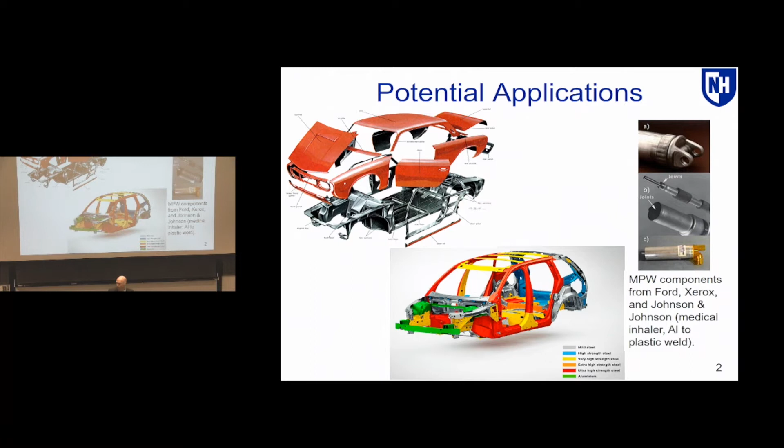So you need to join them together. Or there's some other applications - this is actually something from a printer or even a biomedical case, but you have this need for multi-material joining. And so then that's where eventually I'll get to with respect to the talk that I'm going to be giving and the process that I'm going to be talking about.

Before I get there, I'll talk about it in general terms, and you'll see as the introduction in my research background, I deal a lot with metal deformation processes. So what we'll be looking at is high-rate forming of materials.

So one way to get to a high-rate forming process, and what we use in one of the techniques in my lab, is using electromagnetic forming. Typically in metal forming, you'd have a punch with a given geometry that would come down and form a shape that would then take on the shape of that punch. Alternative to that, and that's just pressure and pushing on it, which could be mechanical or hydraulic, you can actually use a magnetic field in order to form a workpiece.

So you charge up a capacitor bank with a fair amount of energy - it could be tens to hundreds of kilojoules of energy. You dissipate that into a coil, and the coil could be as simple as a wound wire coil, or we have some industrial-grade coils within our lab.

You induce eddy currents, and then you dissipate the energy in the capacitor bank into this. The entire process is pretty quick. You have tens of kilojoules passing hundreds of kiloamps of energy through the wire. You create the magnetic field, and that has a sinusoid - I'll show some current traces in a bit. The whole process is done within 100 microseconds, but that magnetic field induces eddy currents in any nearby conductive material, which flow in the opposite direction. Then that creates its own magnetic field, and those two opposing magnetic fields create Lorentz forces that deform the workpiece. I think I've hit all of the things stated on this.

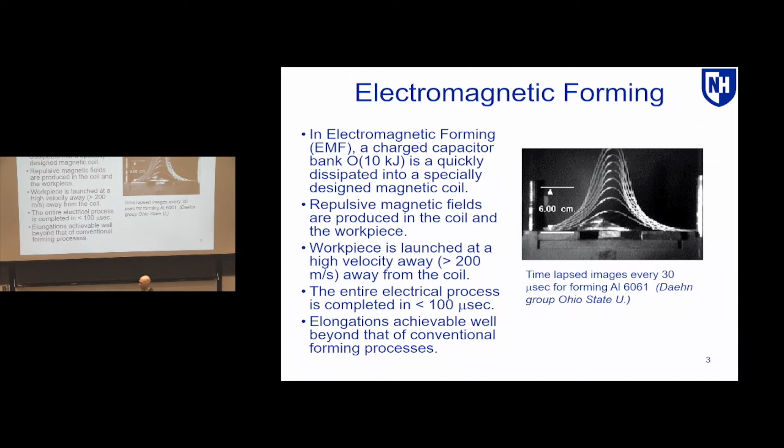More work out of Glenn Daehn's group showing the types of things you can do with this process, as you create micro features and parts with respect to it.

One of the aspects I want to talk about is the physics of the process. Again, you create this magnetic field, inducing eddy currents in a nearby conductive material. Those eddy currents only flow through the outer skin of the conductive material. So you can calculate a skin depth, which is based on the electrical resistance, permeability, and frequency of the current trace - and you create the skin depth.

Again, you can create micro features with respect to the part. Or, going back to that first slide, creating magnetic pulse welds - if you take a tube and a shaft, take the coil, put it around a workpiece, and shrink wrap the tube onto the shaft, you can create a solid state weld.

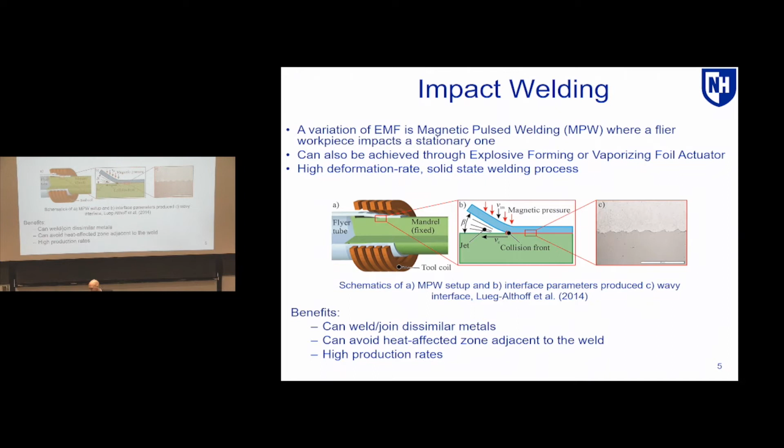Some of the benefits with respect to this impact welding is you can join dissimilar materials, you're affecting the heat affected zone, making it smaller, and then also the high production rates that occur. This just shows some more images of parts or different material systems that can be joined. Here's copper and aluminum, copper and brass, just aluminum to aluminum. You can sometimes see little vortices that get generated with respect to the weld.

And again, you need a certain velocity with respect to the process. And there's a certain amplitude and wavelength with respect to the welds that you typically see in these interfaces. So the research questions we were really after was, because velocity is such a key in the process, can we come up with ways to analytically predict the velocity during these electromagnetic forming processes? We also looked at what the fundamental physical mechanisms were, and then I'll end by talking about some process parameter ranges in which you can achieve the good solid-state welds in the process.

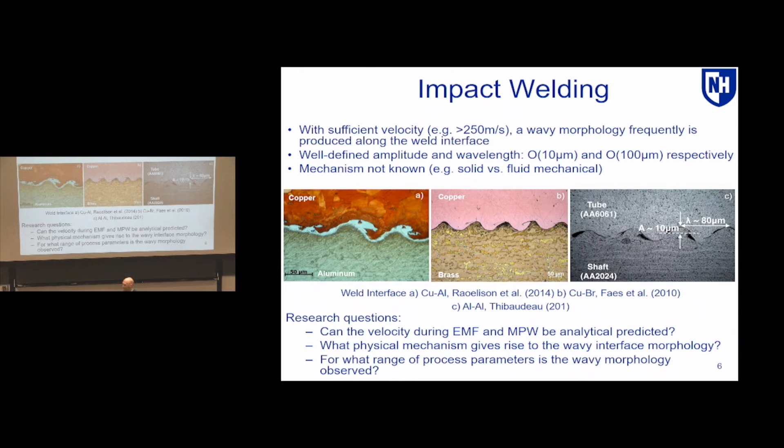So I really already went over an overview of the process. I'll talk about that velocity prediction and experimental validation, and I'll talk about it with respect to two processes. One is just electromagnetic forming and axisymmetric tube compression. So for both of these, I'm really just accelerating the material, measuring the velocity within the process, because that's a key process parameter. And then we'll go on and talk about some numerical simulations of a weldability window to talk about what range of parameters, again, velocity, and the other key parameter is with respect to the impact angle. How are the two materials colliding with respect to each other? That becomes the other key process parameter to consider.

So again, when I talk about electromagnetic forming, I'm going to talk about a specific tooling geometry with respect to that. They talk about this as being the uniform pressure actuator. This came out of Glenn Daehn's group at Ohio State, where, again, they would have a coil that's creating the magnetic field. One of the things you want to do within the process is really control where the current is flowing as it's getting induced in any nearby conductive materials. So what they worked on was having this return path that goes around and then through a die and back around, so that you create a nice flow of the induced eddy currents in the workpiece that's there.

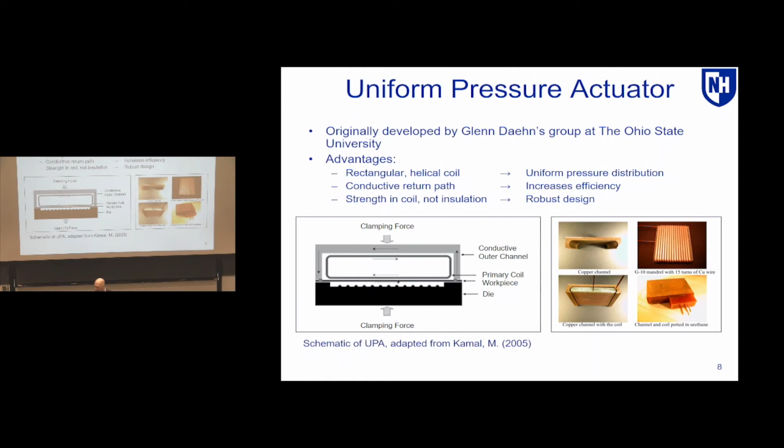So again, what we're after with respect to this is really trying to predict that velocity within the process. And so we're doing electromagnetic, mechanical, analytical models, and we've done numerical simulations. Certain numerical simulation software packages allow you to do those all coupled together as well. But we're looking for maybe a more simplistic way to look at it. Could we really do the predictions?

So these are all loosely coupled together, where you start off, we figure out the coil parameters, we send a certain current trace into the workpiece, we create a magnetic field, that generates a magnetic pressure. We started off with respect to doing this where we just assumed rigid body motion. I'll show an extension of this where we got rid of that pretty simplistic assumption, but we wanted to see could we just simply predict it with rigid body motion?

So then from that, we have acceleration and workpiece velocity, and you could also use this in order to design a coil. The final thing, you'd get position, and it's loosely coupled because the workpiece moves. And when the workpiece moves, that changes the magnetic field that gets generated in the process, and then you have your current trace changing and the current level changing.

So I'll go quickly through the equations, not spending too much time on them, with respect to all the different steps within the process. For the electrical analysis, very simple circuit design where you'd have the capacitance, resistance, and inductance of the circuit. I'll have numbers later on where we can measure it with respect to the machine, with respect to the coil, keep track of all of that.

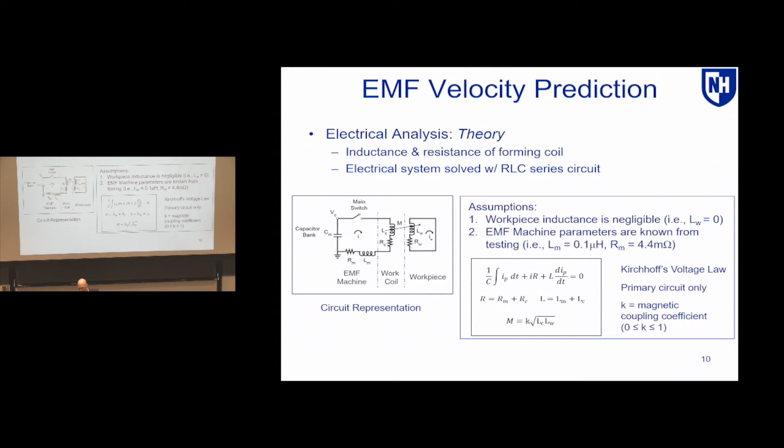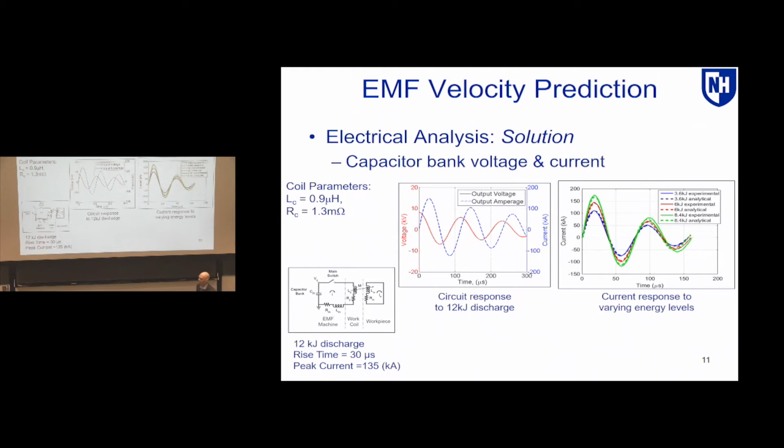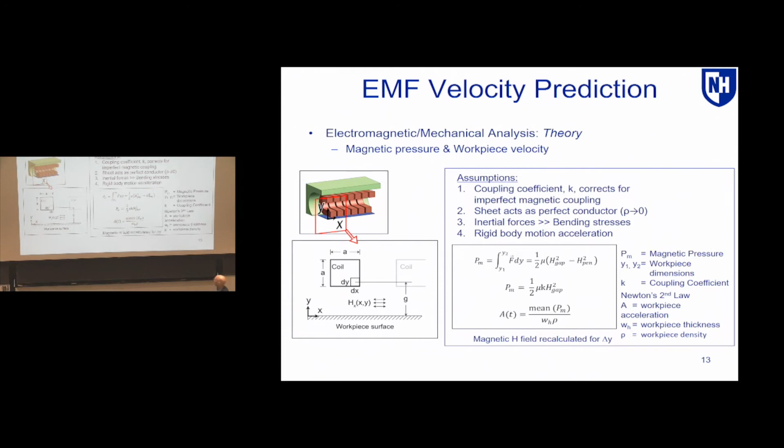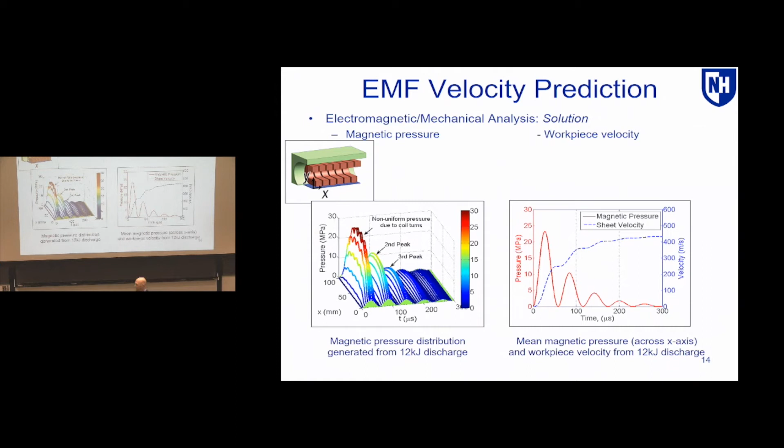What you'll see is we're really after kind of capturing, do we get that first initial peak velocity, or that plateau in the velocity that occurs. So that's the analytical model. What we want to do is compare that to experimental results.

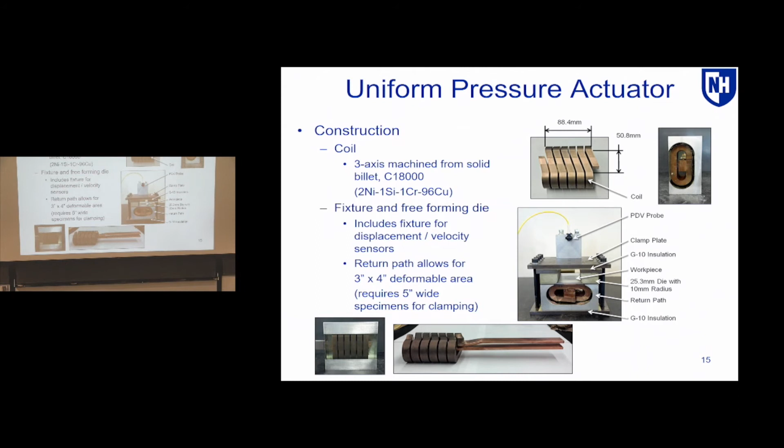The laser beam goes out, returns back as the workpiece moves. There's a shift or a beat frequency with respect to that laser pulse, and that's what we're using to measure the velocity in the process.

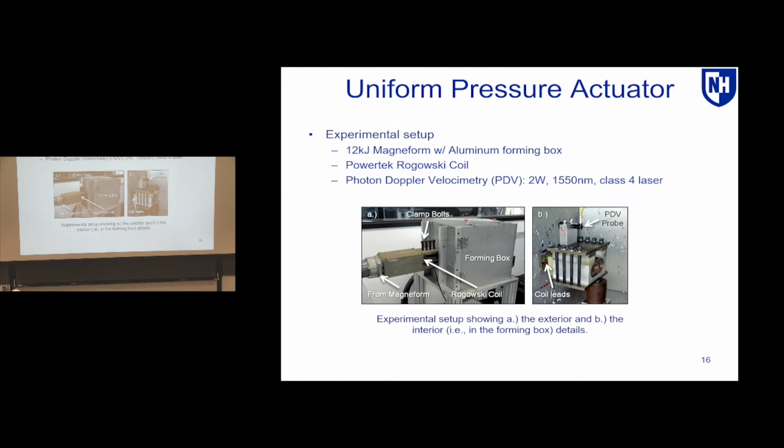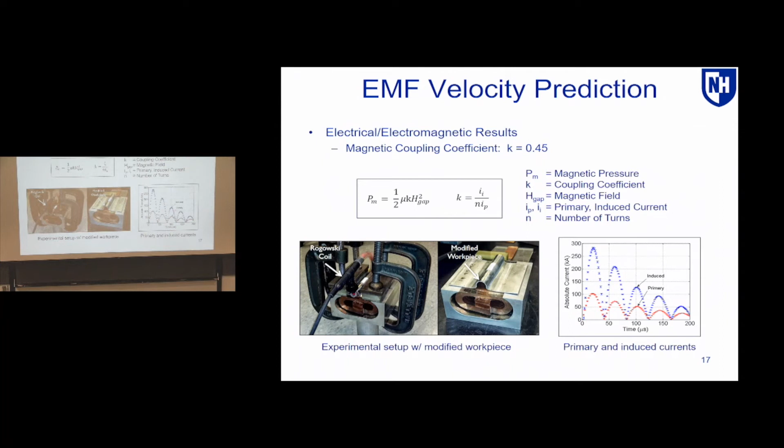And so what this shows is, again, one of the key parameters is with respect to that coupling with the process. We want to understand how much of that electrical energy got captured within the process. So what we did in order to do that is we bent up a specimen so we could use our Rogowski coil in order to measure the current passing through the workpiece. That's how we were able to calculate a coupling coefficient for our process, which is about 0.45. We just measured the primary and then the induced, and the induced is a transformer effect because of the multiple coils that are within the process.

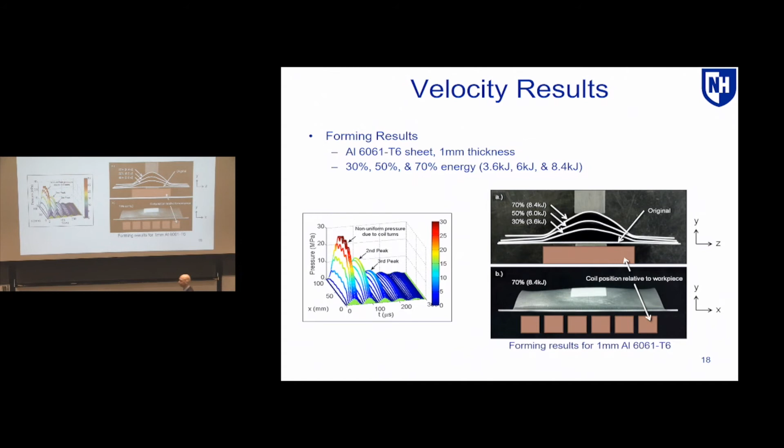Experimental measurements — we did 3 runs of each experiment, so you can see really consistent velocity measurements. You can see how we're doing pretty well predicting analytically despite the fact that we had that very simplistic rigid body motion assumption, but I'll show in a bit the way we could address that in reality.

So decent predictions, again, the coupling coefficient being a parameter going into our model. We can see here that the coupling coefficient is the same regardless of the energy level put in.

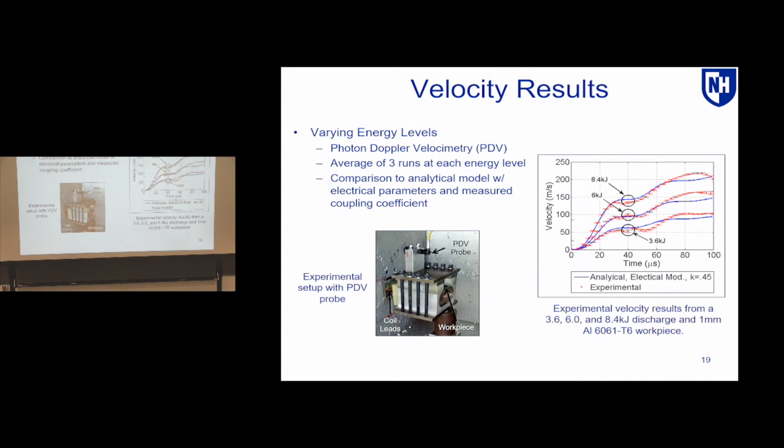So what we wanted to do is look at it in terms of the alpha ratio, which is the sheet thickness to the skin depth calculation. Eventually you're not going to be capturing the electrical energy, you're not going to be inducing the eddy currents properly in the workpiece. As you do that, you're not going to be predicting well, or that coupling coefficient is going to be changing. That's what we're looking for — at what level does that change occur.

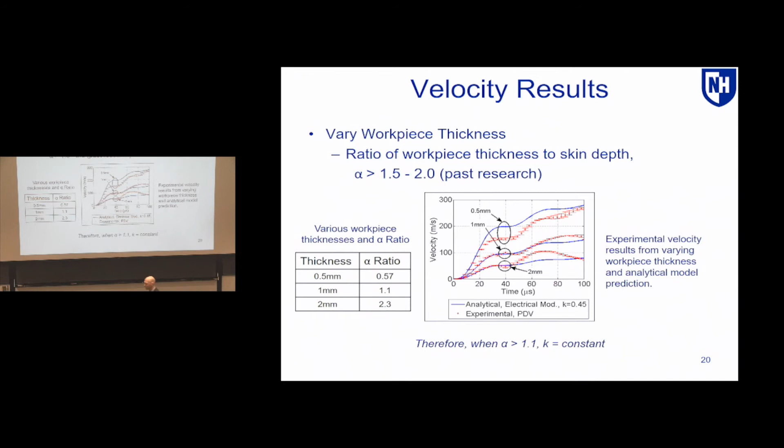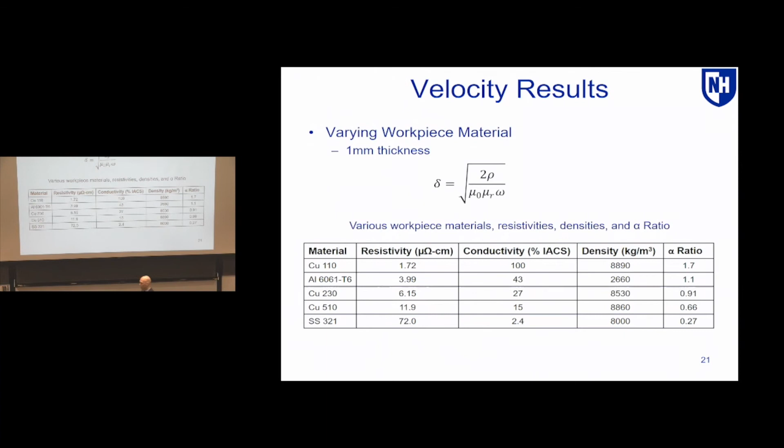We also didn't just look at one material, because the skin depth is really a material parameter. We looked at different materials to evaluate it in terms of changing the coupling coefficient, or the skin depth. So we took pretty pure copper, some brass alloys, and stainless steel. We looked at the resistivity, noted the density differences and the conductivity differences — stainless steel not being a very conductive material. This let us get some different alpha values that we can then evaluate in terms of the efficiency of the process.

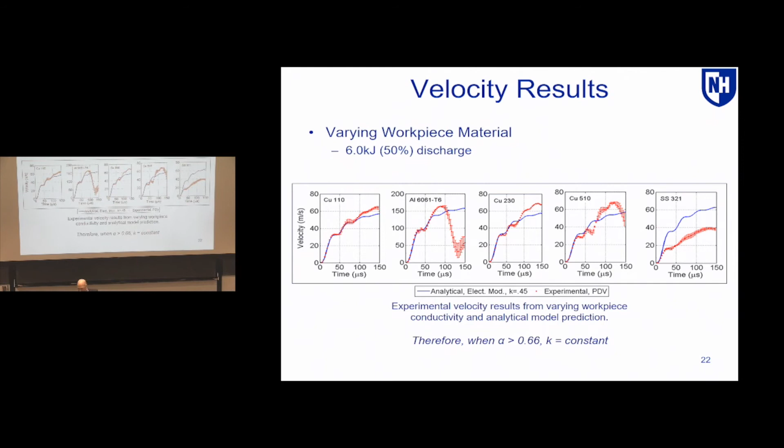So again, thinking about that alpha value, thinking about what kind of ratio you need between the thickness and that skin depth, now we're down to maybe even a 0.66 that's able to fairly well capture that effect. All of these were 1 millimeter material at the 6 kilojoule level, and as I said, that all included a rigid body motion assumption, not a great assumption for mechanical deformation.

So what we've gone on to do recently, and we're still working on this - it was easier for me to present all the data we had from the rigid body motion assumption, because that was more of a complete study. But what we can also do is look at simple plate theory, wanting to have a very simplistic analytical model in order to evaluate the process. So we can use Mindlin plate theory.

Here's the equations where you have normal terms with respect to the stress and the strain in the process, shear terms, shear strain being calculated by not only deflection but rotation. If I go on to the next slide, I think the other thing that's nice about doing the plate theory is you can see the saddle shape, hopefully, with respect to this 3D point plot. But before, when I was presenting the other results - and maybe I should have been more clear about this - that really wasn't capturing any kind of shape change.

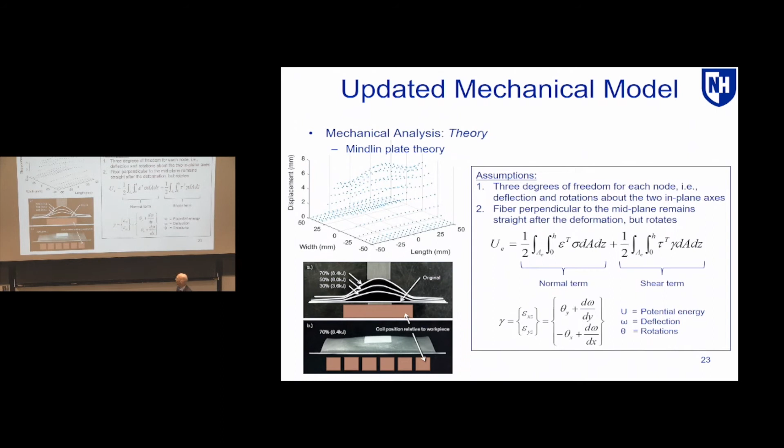It was only capturing the velocity at a point right in the center. So what we can do now also is look at the velocity, and we still are reasonably predicting the velocity within the process. But the other thing we can look at is in terms of predicting the shape of the final workpiece. So this is the width direction, this is the length direction.

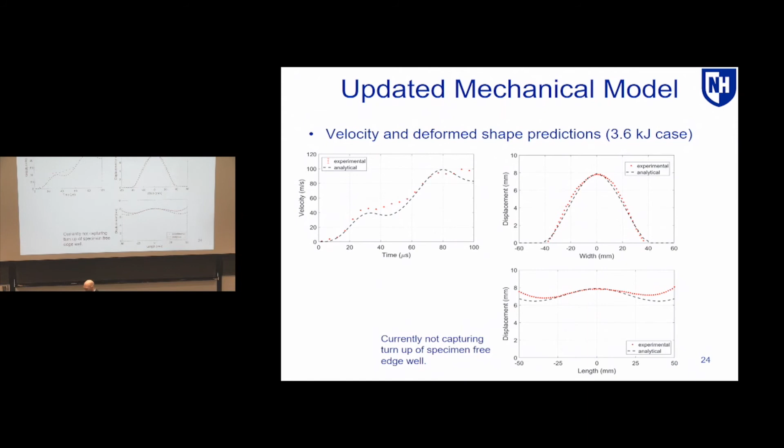So that's all with respect to the uniform pressure actuator or sheet forming. I'll show some real quick slides just showing the same type of principle used for tube compression.

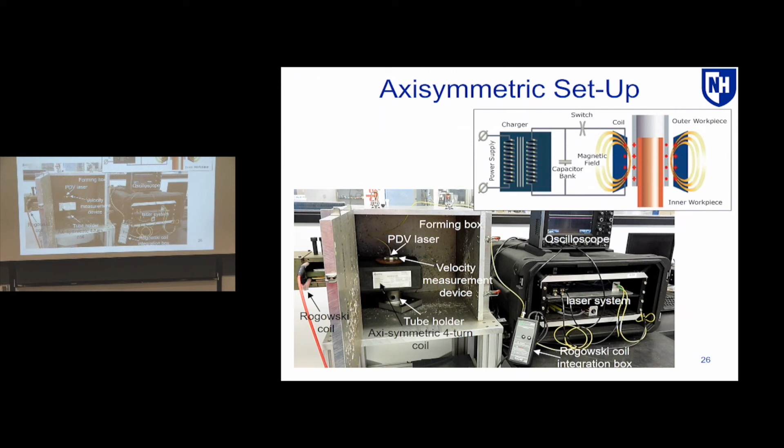So if you think about the shaft to the tube welding, this is again where we'd really care about the velocity within the process. This again just shows the setup - another schematic of the idea of having the capacitor bank that goes through a high energy switch. What becomes important is having some type of way to concentrate the electrical energy, and so you'll often have field shapers within the process that concentrate the energy over a small landing area. Otherwise, this maybe shows a little bit more of the process setup with the high rate oscilloscope, the photon Doppler velocimetry system, and this is the commercial coil we use for these processes.

This is kind of a side view of what we have in the process. So this is a 4-turn coil now, and this component is the field shaper. Again, you have the coil, but you want to concentrate the electrical energy or the magnetic pressure down onto a smaller area, so you use the field shaper in order to do that.

And again, with respect to skin depth, the induced eddy currents are on the outside of the workpiece, but then what you have is, as it goes through here, you have a little slot in the field shaper that will focus the energy down into that landing area so that you can have the deformation over a smaller area compared to the larger area, focus it down. But this shows the overall dimensions of the entire process with respect to the tube and the axis of symmetry, and again, that field shaper.

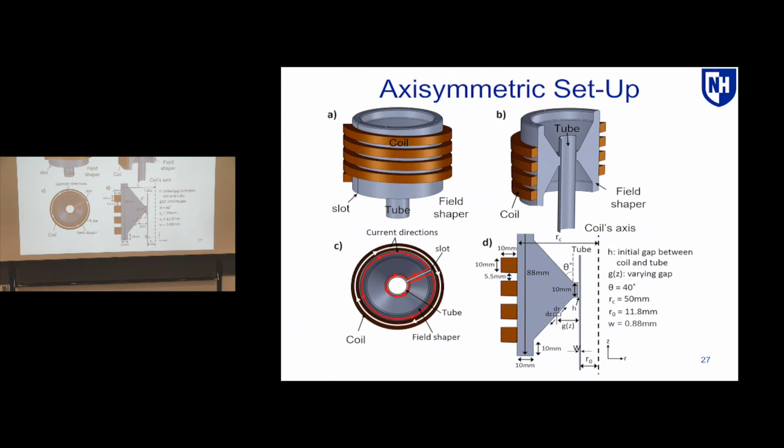And so all of this will be with respect to a 2D analysis, so we're just looking at a cross-section here. Getting the velocity measurements, eventually you'll see, similar to what I did for the sheet forming, we'll have velocity measurements that we'll compare our analytical model to.

Getting velocity measurements out of a tube compression is a little trickier because we really don't want to cut through the coil to look at the velocity of the tube on the outside. So what we do is create a workpiece with a 45-degree mirror on it, pass the laser beam down, reflect it off the mirror and back out.

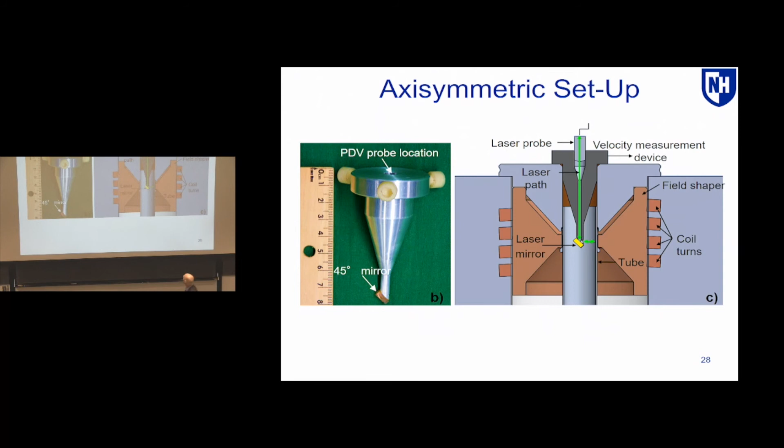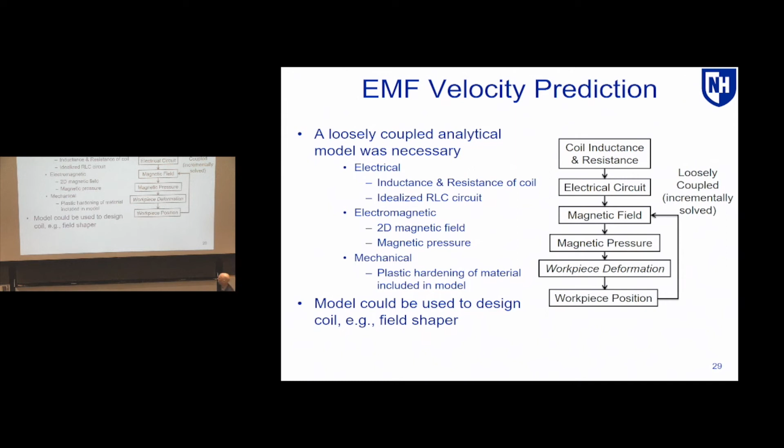Otherwise, I'm doing something pretty similar to what I had last time as far as the model itself, where again we have the electrical component, the magnetic field, and pressure, and now we're able to do some plastic hardening, keeping track of it with respect to the workpiece. Others have done analytical modeling where they didn't keep track of the work hardening or plastic deformation, so that's an added benefit to this research.

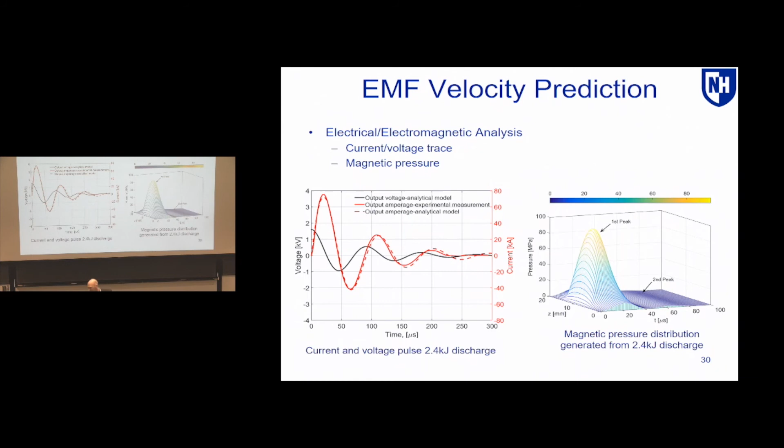For the magnetic, or mechanical, process, this became the way that we solved it. Again, we're looking for really simple mechanical models, so we just use simple tube equations with respect to the longitudinal and hoop stresses that occur within the process, using a very simple von Mises-Tresca criterion.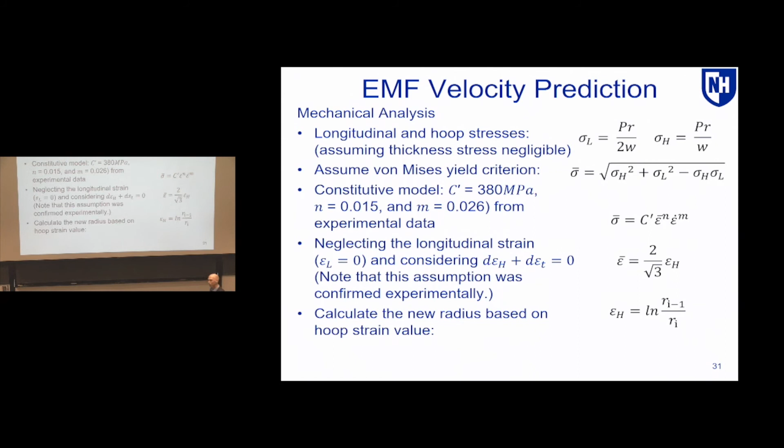We did some Kolsky bar tests to determine the properties with respect to the high rate forming. We made some assumptions within the process, but we're able to calculate the hoop strain, and from the hoop strain, we're able to determine the velocity within the process.

Here are the results of that, where you can see these experimental results at two energy levels, 2.4 and 3.6. If you go much higher than that, you start to see wrinkling within the tube, where it compresses down too much. Our analytical model does pretty well predicting the peak value.

There's a little bit of a time delay shift, likely due to the incremental aspect of our modeling efforts. But I'll say that all of this was two-dimensional in nature as far as the prediction.

So we are also running FEA simulations. LS-DYNA has a nice package where you can do the electromagnetic and mechanical simulations of the process. You can actually see the field shapers having a slot with respect to the geometry, in order to concentrate the electrical energy down.

You can see that with respect to this formed workpiece, so you'd be looking at it in terms of the full 3D effect versus only 2D.

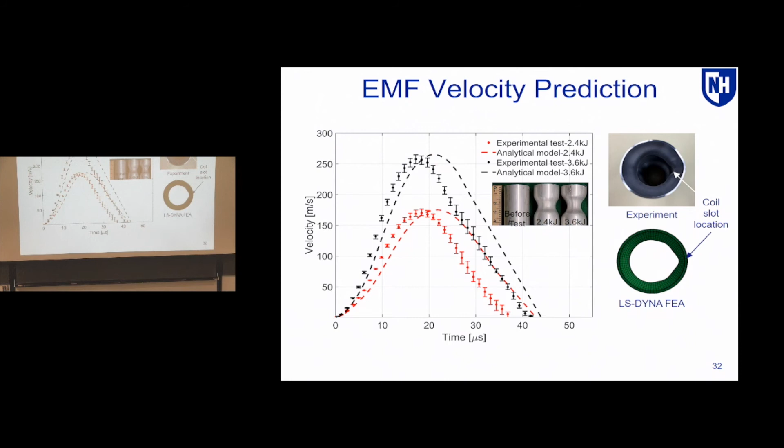I didn't plot it in the end because I didn't talk enough about the numerical simulations, but we actually get good prediction out of the numerical simulations as well, for the velocity, and with respect to displacement, again good prediction with respect to the analytical model compared to the experimental results.

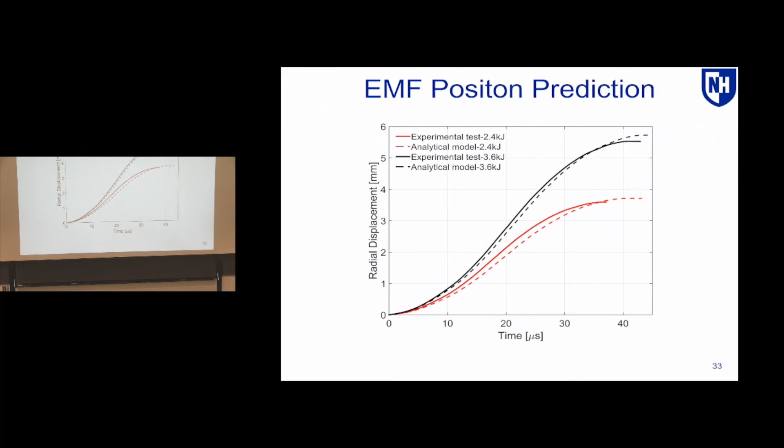So I'll do a little bit of a summary with respect to this idea of predicting velocity within the process. Again, we're looking at velocity because it's such a key element of these high impact welds, and I think we've shown that we can have pretty simplistic analytical models that capture the effects well.

We've also done numerical simulations in FEA software packages. It takes a little more time to set up and is a little more difficult to implement, but we've shown we have good ability to do predictions despite the simplicity of the analytical models. One of the other findings is really thinking about how much that ratio of thickness to skin depth needs to be in order to get a successful inducing of the eddy currents and a successful process.

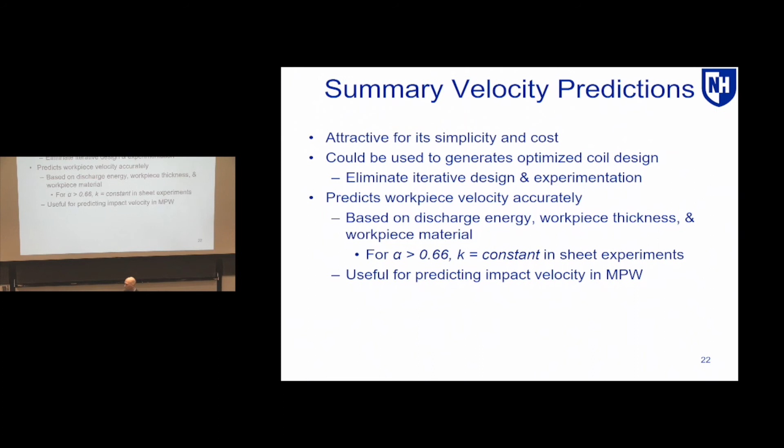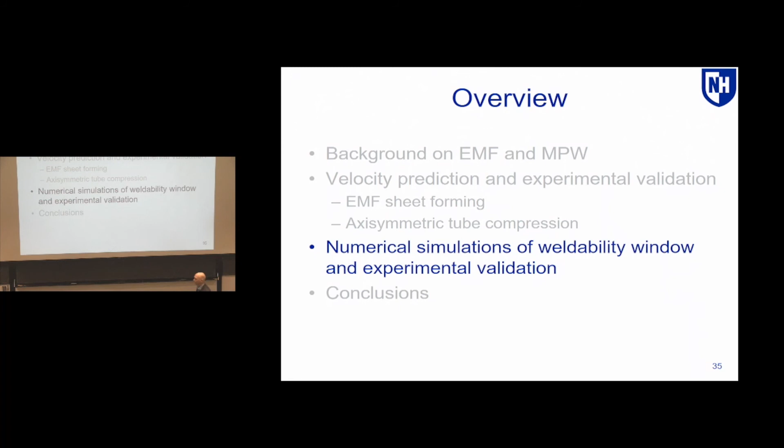So what I want to do now is talk a little bit about some more numerical simulations and experiments, but with respect to actually creating welds. There are different algorithms for numerical modeling, and we've looked at a number of them. If you just use what's traditionally used, pure Lagrangian, you get a lot of element distortion at the interface because of so much shear deformation occurring as the materials move with respect to each other.

So we've tried all of these different ways. What I'll present today is an arbitrary Lagrangian Eulerian simulation, ALE, which uses an adaptive mesh, so you have a different mesh right at the interface in order to address those large deformations. But you can also do pure Eulerian or even smoothed particle hydrodynamics to run a simulation and capture the effects.

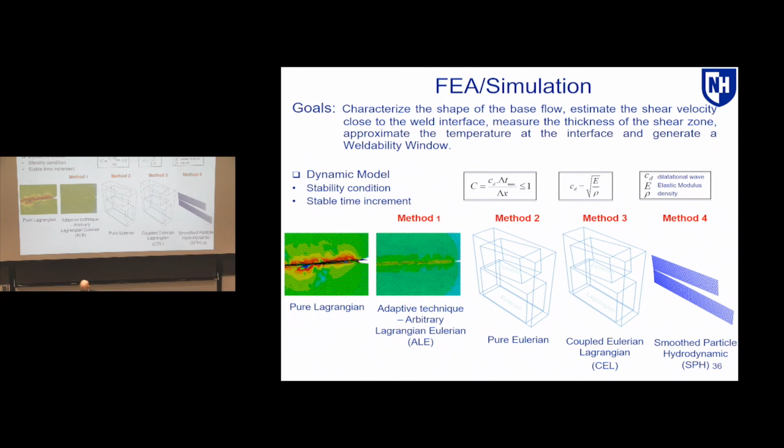So this shows a little bit of information about our model. The other key process parameter, in addition to velocity, that you'll see us varying is just the collision angle. As the two materials come together, what's the angle they're coming together at to create that sliding motion? So initially we did very simple 2D models where we set some impact angle and give it an initial impact velocity.

At the interface we have ALE elements that can adapt to handle the large deformation within the process, but otherwise the rest of the mesh can be regular Lagrangian in order to speed up the simulation time. Those become the two parameters we're looking to vary: impact velocity and the angle between the materials.

I should mention, for the other work we've done, that when you're doing this high rate deformation and inducing eddy currents, you are heating up the workpiece, and that does affect the material properties. In some of the earlier models we weren't accounting for that, but here we are, in the sense that we're able to do Kolsky bar tests so we have a sense of the temperature being implemented into the numerical simulations. So we use a Johnson-Cook model for that.

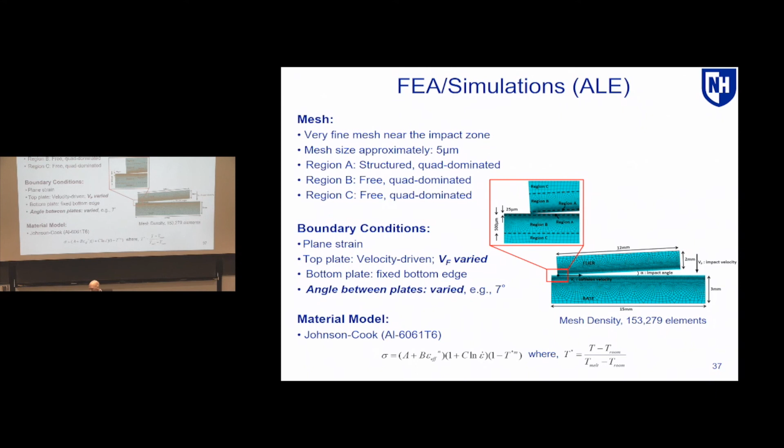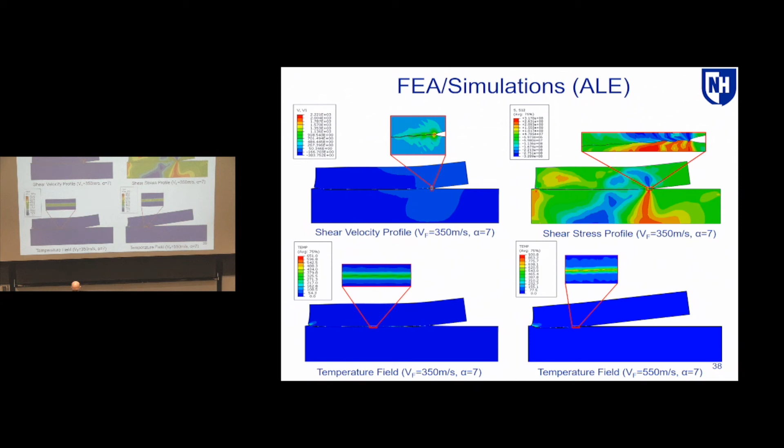But the other thing we'll be able to look at is the temperature rise at the interface. Again, the nice thing about numerical simulations is we can get some sense of that, and you'll see we attempt to compare the temperatures at that interface by looking at micrographs of the material.

This idea of a weldability window is really collision velocity versus angle of collision. People have looked at this as a weldability window where you're able to get a nice wavy interface pattern. I talked earlier about this wavy pattern, which may or may not be necessary for a good weld, but if you have that wavy pattern, it is an indication that you have maybe achieved a good weld within the process.

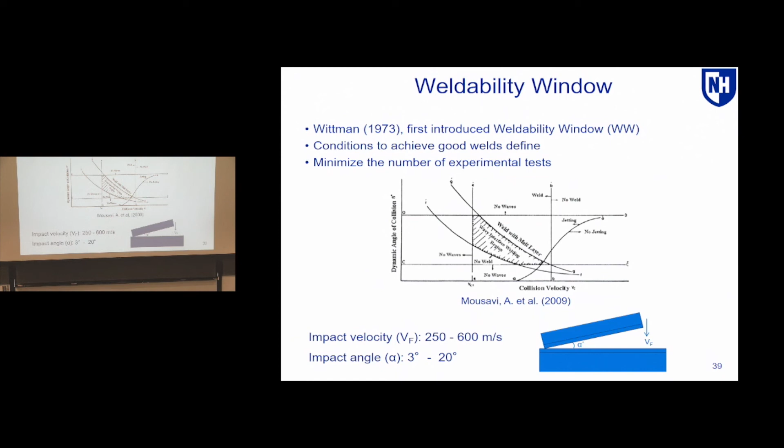So what we did was vary the impact velocity and vary the impact angle as we had talked about, and then you can do a bunch of simulations.

This is one of the things the graduate students asked me at lunch today, if I had any advice. And I commented that you should always be interfacing with your advisor often. This is what happens when you don't interface with your advisor often. My graduate student ran all of these numerical simulations, which were taking a couple days to run, but he was about halfway through before we met up and he told me what he was working on. I was like, I don't know if that would have been my first idea. But he did. He ran a large number of numerical simulations, and then we could really look at them and see regions where there is no bond.

Sometimes the materials would hit and actually rebound off each other in the simulations. I'll show where we actually see that in some other numerical simulations.

This shows the idea of a smooth interface, where you see all the shear velocity or the shear deformation or shear stresses on one side of the interface, not the other. Then you have a good, nice, symmetric shear velocity profile, and you could sit there and characterize them.

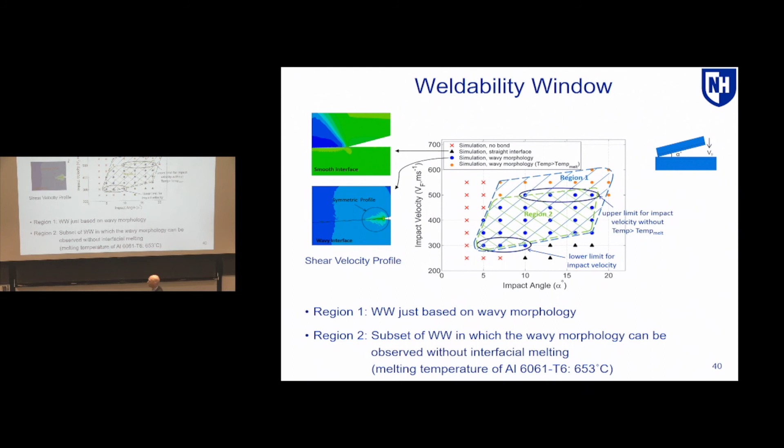You could also look at the temperature and compare it to the melt temperature of the material to see where you might have a good weld, but you also might have an area with potential for melting of the material because you're at temperatures much above the workpiece or melting temperature. So we talk about these as region 1 and region 2.

Going back to that weldability window I showed previously, we can map onto it. We saw what we expected to see even in the numerical simulations: cases with no bonding, cases with a straight interface, cases showing a nice wavy pattern, and some where the temperature is so high that the material is melting. So it's very consistent with what other people have found experimentally.

The last bullet talks about the fact that the problem with melting is that you can have intermetallics which could lead to failure within the sample in use.

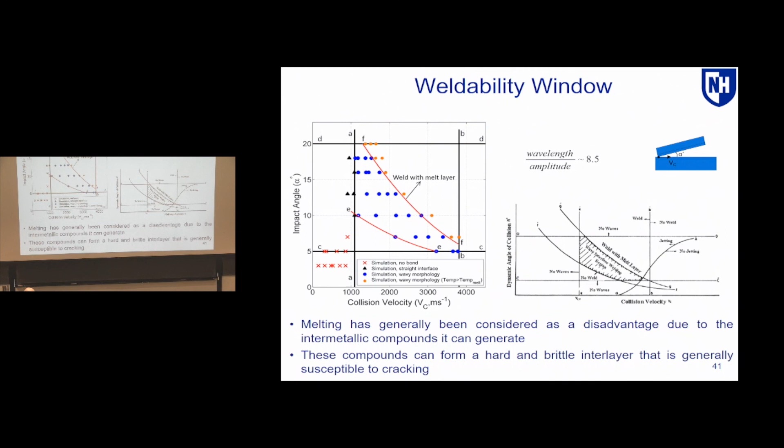So what we wanted to do is run some experiments to validate our numerical simulations. We used the vaporizing foil because it creates much higher velocities than you can with just the magnetic fields generated. You create a plasma by vaporizing a foil in order to do this.

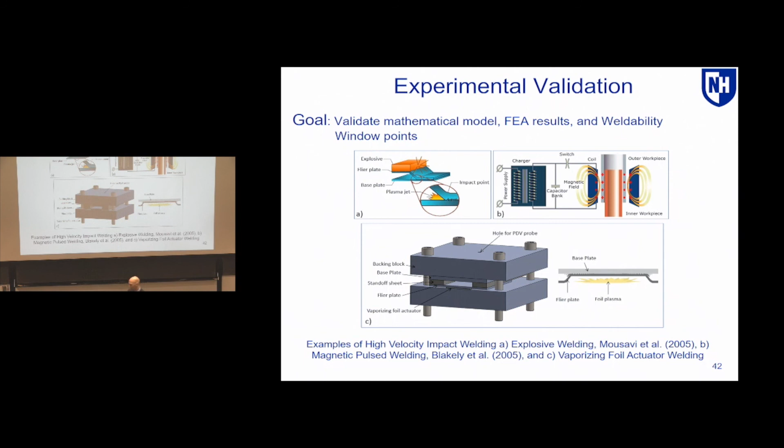This shows a better view of the experimental setup: here's the foil, the workpiece is here. You have these standoffs that change the impact angle, and the vaporizing foil has one end connected to one lead of the capacitor bank, the other to the other lead.

It's really using the same capacitor bank you'd use for electromagnetic forming, but now you're just vaporizing the foil instead of passing current through the coil to create a magnetic field, using a thin foil of aluminum, for instance.

Changing the standoff distance changes the impact angle: standoffs closer give a higher impact angle, moving them farther away changes the impact angle in the process. If the impact angle is too low—3 degrees isn't enough to create a weld—you get this racetrack where the materials have hit and are sliding with respect to each other, but welding does not occur.

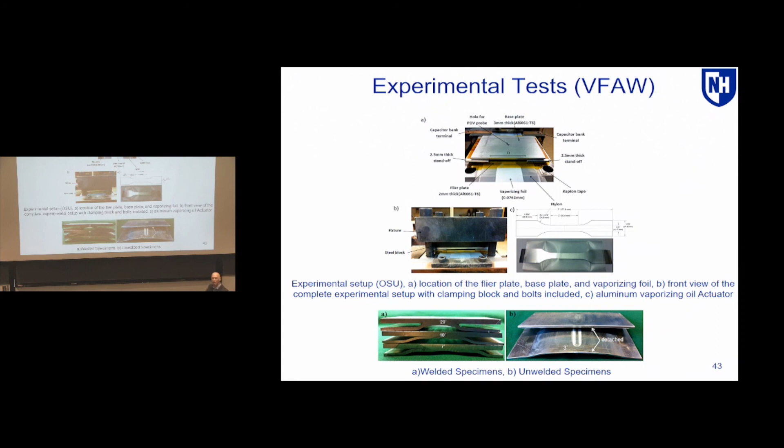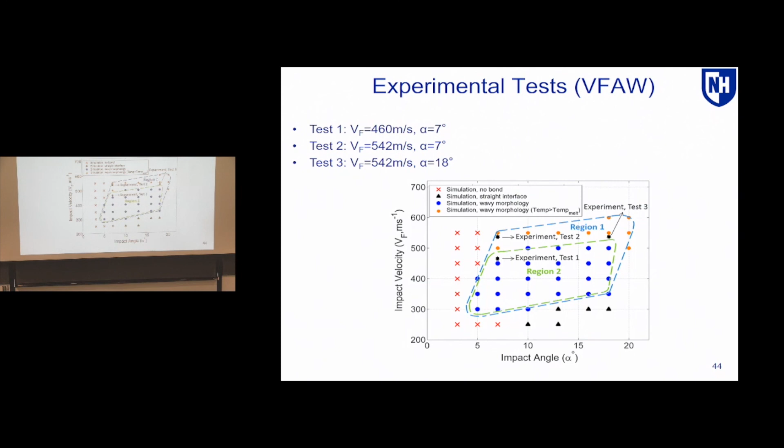So what we did was look at 3 cases, taking 3 tests from different regions: one where we should see a wavy pattern, one where we should see some melting of the material, and another higher test where we should also see some melting.

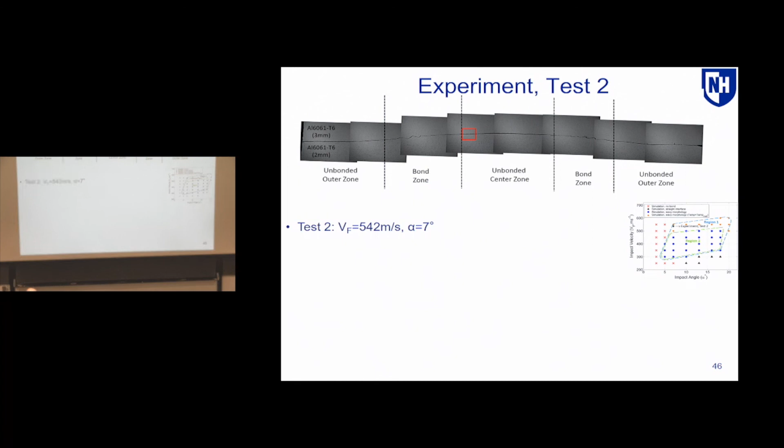This would be deemed a nice weld because it's got a wavy pattern that doesn't indicate any melting, and this didn't indicate temperatures so high that you would get melting in the simulation. Here we show that unbonded area, so you do see a gap within the parts when you look at them.

But even when you have a gap, you can start to see some high temperature or some features that I put this in because Ian, I know, would want to have some micrographs, right Ian? So he can help me interpret these a little bit better.

But then you can see some effects within the micrograph that could lead you to think that there's melting occurring there. Or if you look at a different region, off where the wave occurs, you can still see some region that maybe is some indication of melting.

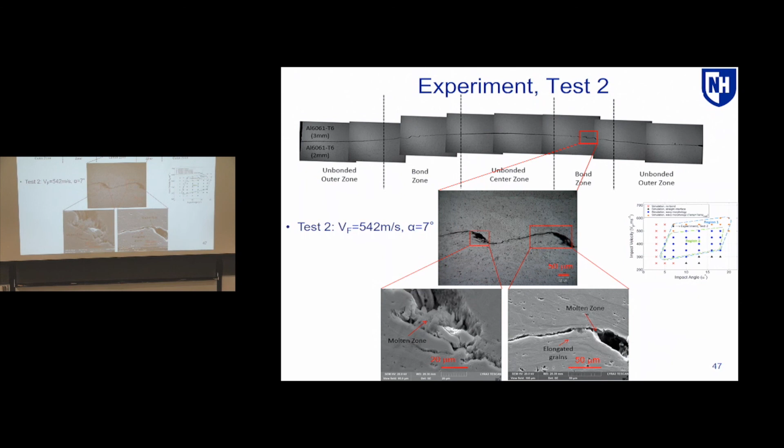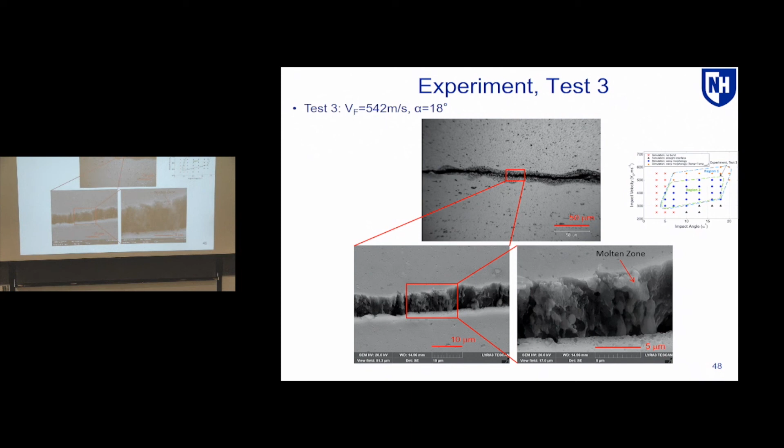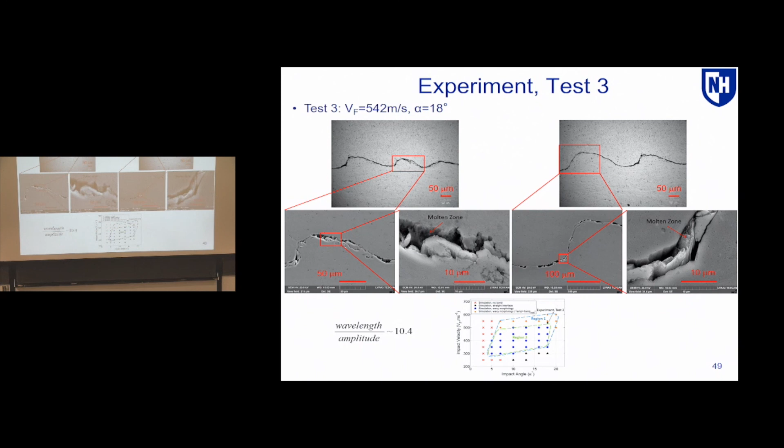And then here is the highest impact angle case, case 3, where right at the interface you just see these features within the material, even to the point where you see some gap separation between them. Even on something that seems like a nice wavy pattern, you have some gap that occurs where the materials have hit so hard together.

The original simulations we had ran were just 2D plate hitting at a point and then sliding. So what this shows is more trying to emulate the process itself, so we'd have some standoff distance. This is numerical simulations, same idea, we're using Abaqus for this.

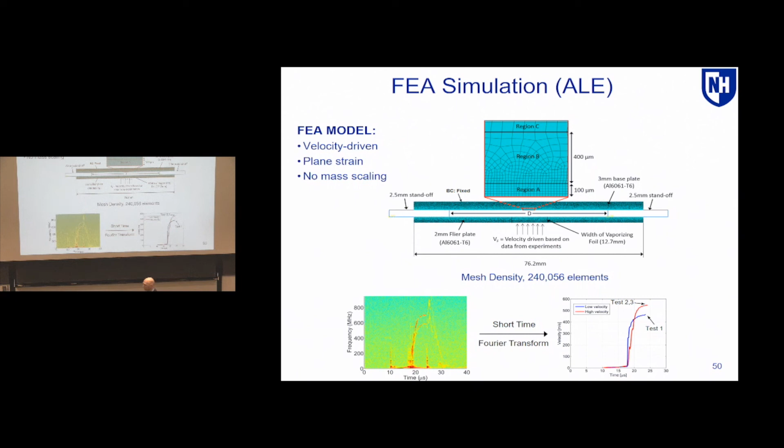With the ALE elements at the interface colliding together, we're able to figure out what kind of velocity to put in the process, from photon Doppler velocimetry. And then this shows the numerical simulation results where you can actually see the wavy pattern get generated as the workpiece comes and interfaces with respect to it.

And this is a temperature plot. So again, what we're looking at is temperature to tell us whether or not melting could have been a concern with respect to the process. But the shape, hopefully you can see, is pretty consistent with what we get numerically in the process as well.

And again, the nice thing about numerical simulations is then you can go in and look at lots of details with respect to it. You can look at things like the wavelength to amplitude within the process, and you can do that experimentally as well, and you can see some similarities with respect to the numbers.

Again, kind of a gap region here within the numerical simulations, but then we're able to get to the wavy patterns, which are pretty similar to the amplitude and the wavelength of the wavy patterns at the interface.

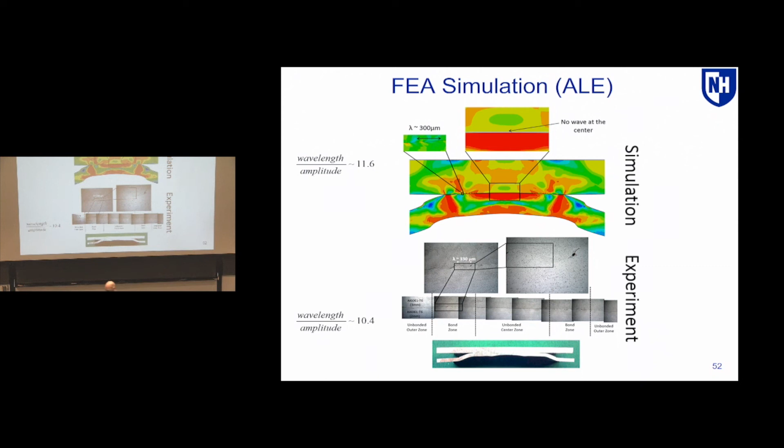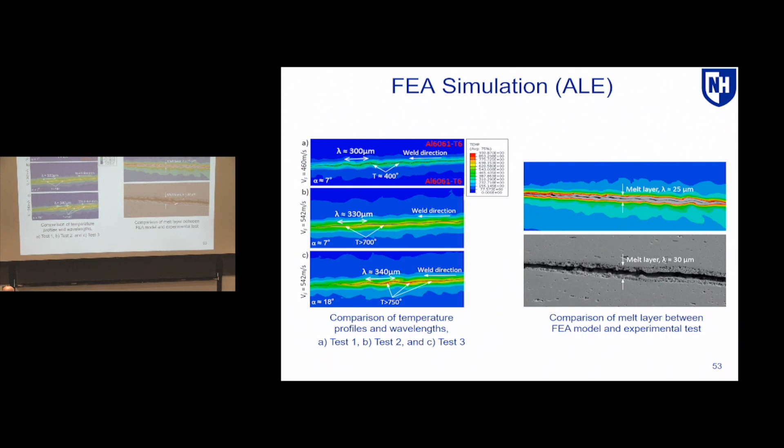And again, with respect to temperature, you can see a melt layer temperature that seems to be on the same order as far as the high temperature region within the process.

So as far as conclusions, again, velocity is a critical parameter with respect to this impulse welding, and so that became the focus of trying to create those analytical models in order to determine that. We showed that ALE is able to actually predict the effects with respect to the process, including a weldability window, and that morphology investigated with respect to different methods.

And so the other thing that I'll point out here is these are the last slide that I had pointed out, the experimental versus FEA amplitude to wavelength. And then we also had our mathematical model and our FEA simulation.

So we actually did, and I had mentioned it earlier, the idea of materials hitting, sliding with respect to each other, Kelvin-Helmholtz instability. I didn't talk about it in the presentation today, but those are parameters, and you get some decent consistency with respect to that analytical model and the numerical simulations as well.

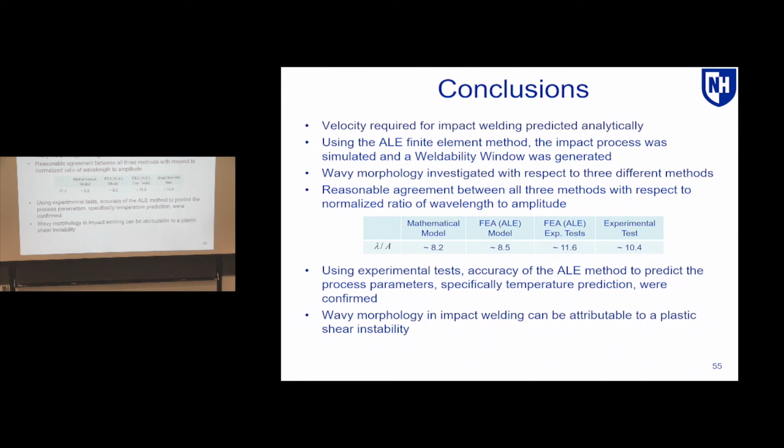So as far as acknowledgement, there's 3 graduate students who are really responsible for the research that I was presenting: Ethan Thibodeau, Shunyi Zhang, and Ali Nassiri, some funding from the National Science Foundation. And Glenn Daehn is someone that I have some joint NSF funding with respect to work on this process, and he's always been great as far as giving some guidance as I've been working on this.